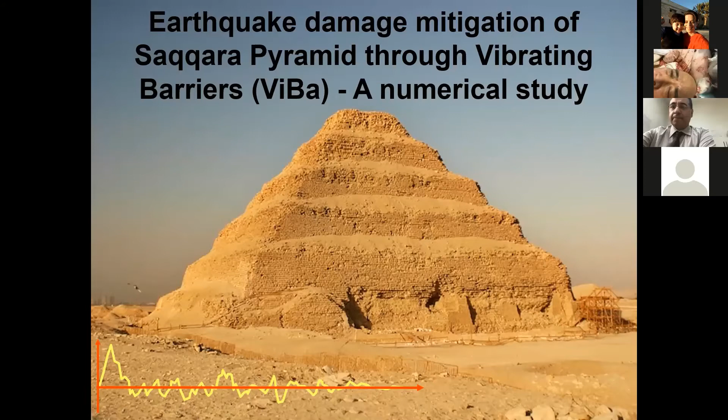I am going today to give a short presentation about our numerical study. This presentation will be on earthquake damage mitigation of Saqqara Pyramid through vibrating barriers, a numerical study focused on the inelastic behavior of the pyramid and the soil, and then the efficiency of using vibrating barriers. As the idea of vibrating barriers is based mainly on exploiting the beneficial effects of soil structure interaction mechanisms, I would like to start with one of the most important factors which control the soil structure interaction, which is the interaction between the fundamental frequencies.

In our case here, we have carried out the numerical analysis under 12 seismic records recorded in Egypt. The fundamental frequencies for these records range from 0.14 to 7 hertz. The fundamental frequency of the soil, which is here limestone, is 22.14 hertz. The fundamental frequency of the pyramid is 0.52. As you can see here, some of the records have fundamental frequencies close to the fundamental frequency of the pyramid.

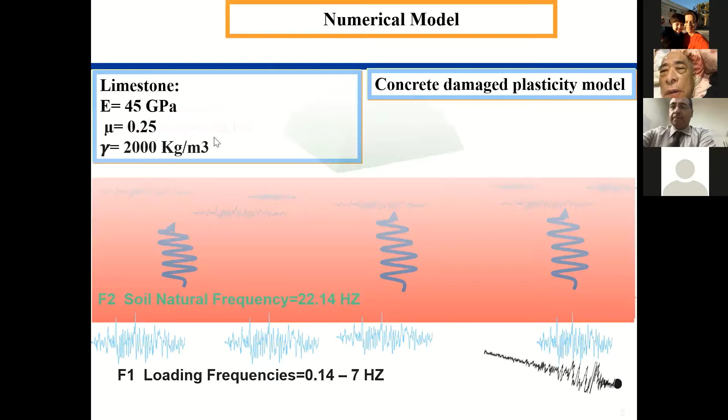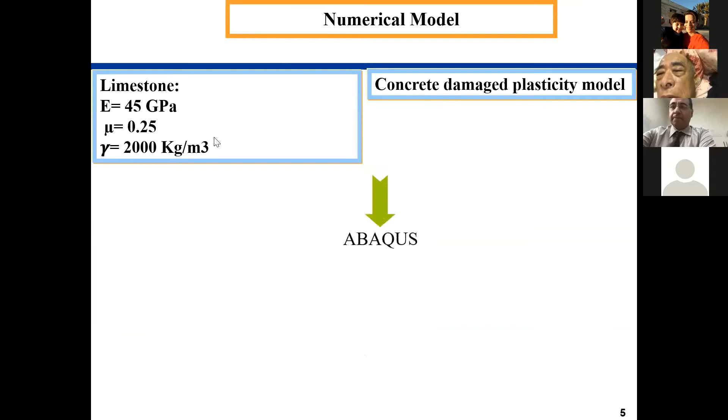In our numerical model, the numerical modeling process was carried out using the finite element software Abaqus 2019. The numerical analysis was performed in 4 steps. First step, the elastic behavior of the pyramid without soil, then the elastic behavior for the soil-structure system, soil and pyramid. Then we analyzed the plastic behavior of soil and pyramid. And finally, we added the vibrating barrier to study the impacts of using this vibrating barrier.

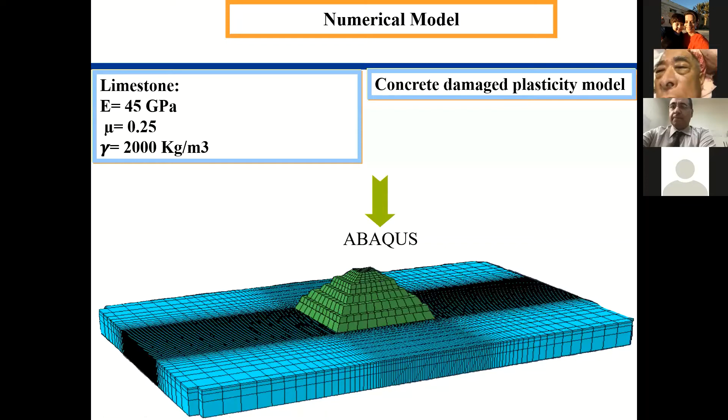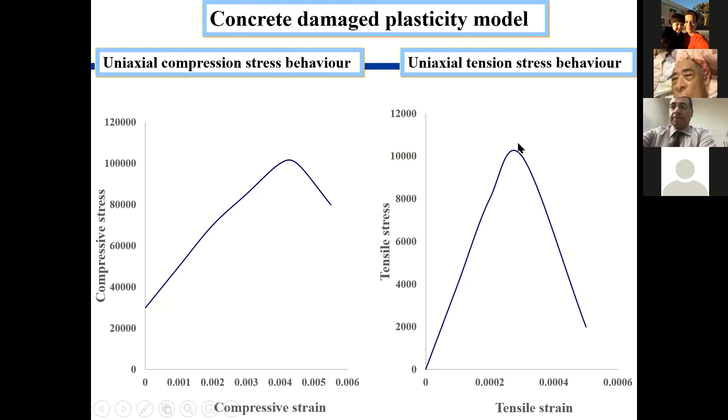Firstly, we have the same material for the pyramid and the soil, which is limestone. Here we have the elastic properties for this material: 45 gigapascal, Poisson ratio 0.25 and density 2000. Also, we have used the concrete damaged plasticity model for simulating the inelastic behavior of the pyramid and the soil. Here we have the data used for simulating the uniaxial compression stress behavior in the concrete damaged plasticity model. We used sigma C maximum equal to 10 megapascal and tensile stress equal to 1 megapascal, 10% of sigma C.

Here we have our model and the mesh, with the dimensions of the soil, as you can see here. The length of the soil used in this analysis is 500 meters, the depth of the soil 35 meters, with width 300 meters. Considering the high sensitivity of soil structure interaction, we have taken some arrangements. For example, we used free-field or quiet boundaries to avoid the reflection of seismic waves on the structure. Also, because this kind of analysis is very costly in terms of processing capacity and time, we decreased the mesh density going away from the structure to minimize the processing capacity and time.

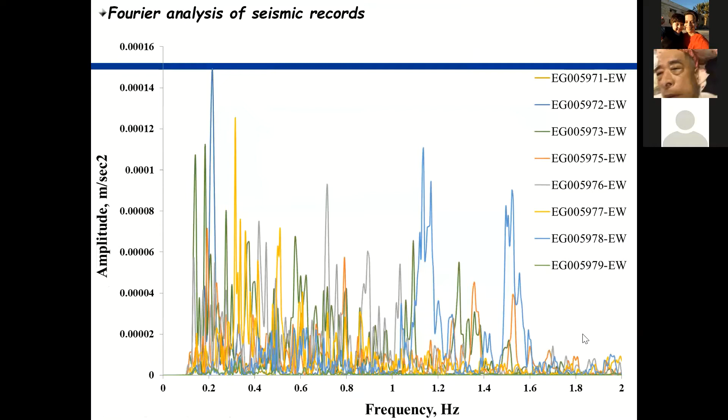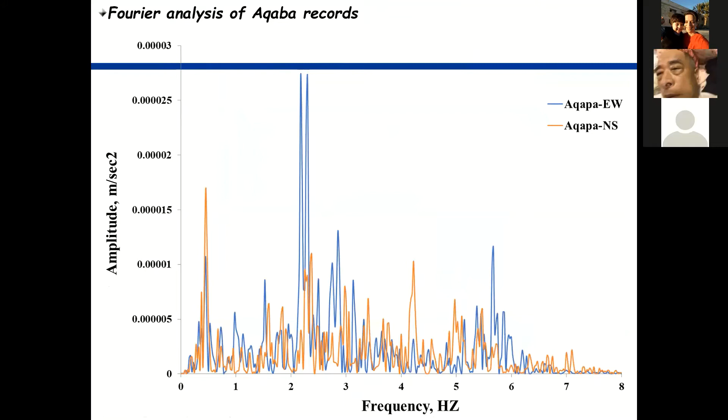Here we have the Fourier analysis of the seismic records recorded in Egypt recently. As you can see, we have frequencies from 0.14 to 2, with amplitude in meter per second squared. Also, here we have the Fourier analysis for the Aqaba records, Aqaba east-west and Aqaba north-south. As you can see, we have fundamental frequencies up to 7, but the maximum is about 2.3. So in the first step, we ran the numerical analysis under the Aqaba east-west record.

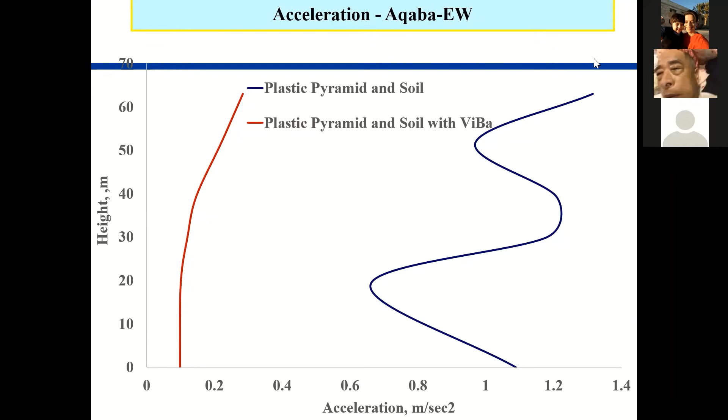Here we have the stress, or vertical stress according to von Mises, without the vibrating barrier and with the vibrating barrier. We can see here we have some tension, but it is very small, 0.6. And here we have more, but here in the pyramid, we don't have this tension.

We have reduction in compression stress in the pyramid when we have used the vibrating barrier, up to 94%, 85%. So it was a huge reduction in compression stress in the pyramid.

We have here the active yield zone in the pyramid without vibrating barrier. A large part of the pyramid already has plasticity and yielded. Here, using the vibrating barrier, I don't have anything. It is 0. Here I have 1 for the red zone. So a large part of the pyramid is already in yield or plasticity.

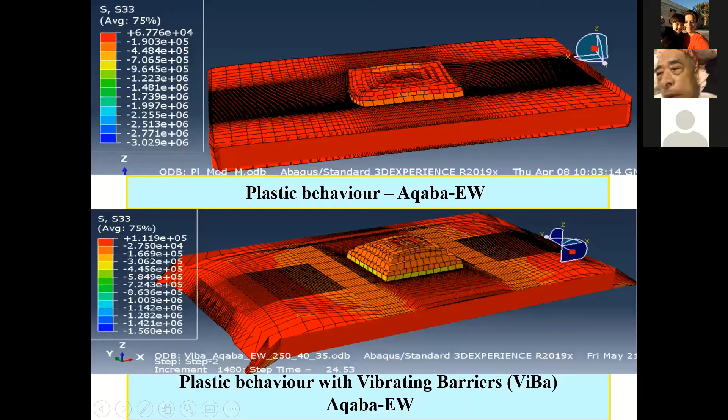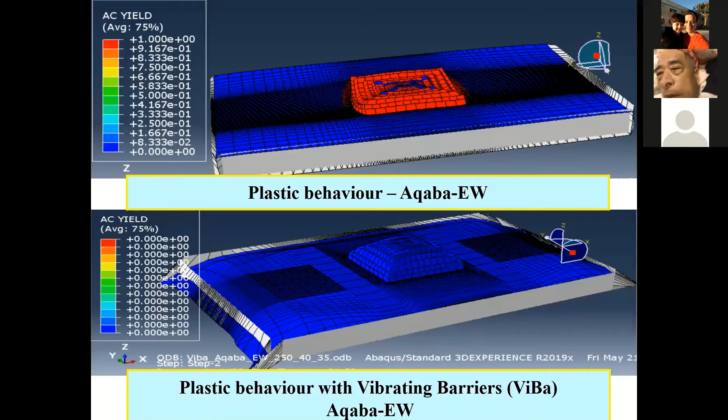Okay, thank you. Can you please go to the very beginning with the model, when you show the various frequencies? Yeah, that one. Thank you. So, if I understood, you are saying the first frequency of the pyramid on its own is 0.52 Hertz? Is that what you mean? 0.52.

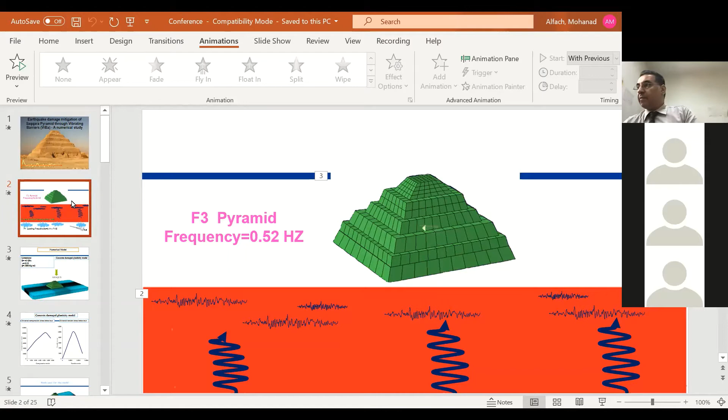Really, it's the first time that I see these results, but I think you know of the paper co-authored by Professor Ayoub and Professor Rashid, where we did our linear analysis. It is published. We have different frequencies, actually. Can you explain? I'm sorry, I noticed that, but I think it is the data. We have different data about the density and the Young's modulus. I received different data, and I noticed the difference between my results and your results.

Oh, I see. The data has been provided by University of Cairo, so we are all using those data. I noticed you have used a different density. They sent 2,000 kilogram. You have used 2,900 or something like that. So it is different from what I received. Also, I noticed there is a difference in the Young's modulus. I'm sorry, it is a problem of data.

Okay, so the material of the soil is different from the material of the pyramid for you? No, it is the same. And how do you explain then that you have 22 Hertz for the soil and 0.52 Hertz? It is the geometry, and of course the height. Here we have 63 meters, and the geometry is different. I have here 35. I think at our meeting we will discuss more in detail.

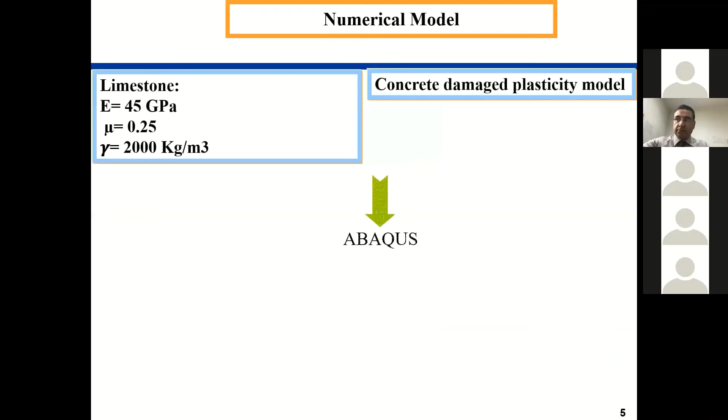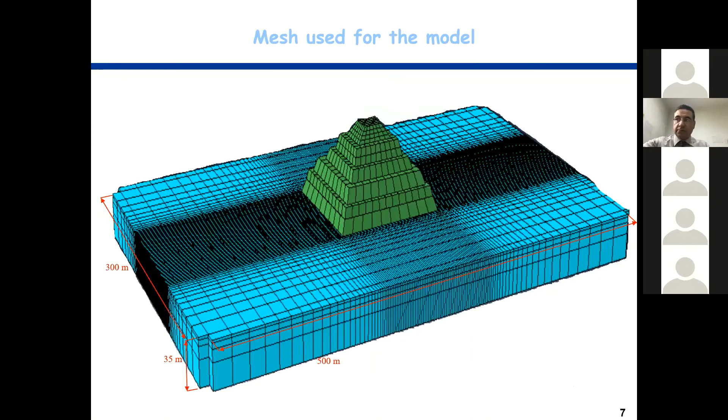No worries. The other thing I was asking is, can you please go to the vibrating barrier? Yeah, this one. So this is the trench of the vibrating barrier. Have you designed the mass vibrating inside this or not? No, I used it as a block of concrete with contact. So practically it's rigid, a block of concrete in the soil. Yeah, and with the interface rigid with the soil.

Okay, I see. I mean, this is not really what we call a vibrating barrier. Practically, this is a solid element. A vibrating barrier has an internal unit that vibrates and needs to be designed in such a way that you reduce the vibration. From what I understand, also the depth is the same depth up to the bedrock. So practically, you interposed a rigid element in the soil. It's good that you had this kind of reduction, but what I want to say is this is not properly what we call a vibrating barrier.

As I understand from soil structure interaction, it is the effect of the inertia of the structure and the foundation. So here we have a kind of foundation, a big foundation or big mass in the soil. So we have the same result, but with a different technique. Yeah, no, I understand that. As I said, this is not what we used to call it.

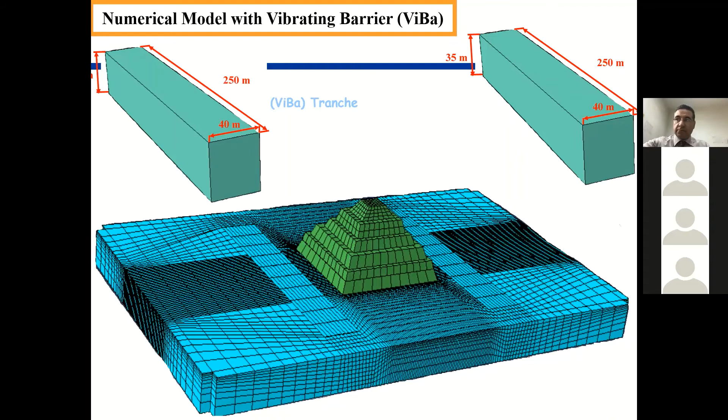For you, I can understand now the model is different, so possibly you cannot use it directly until you fine tune your models with ours, because the vibrating barriers we designed also have the internal unit. But yes, I appreciate that. The other question was about the earthquakes. You said that you got the 1992 recorded earthquake. It's from Egypt. Where do you get that? It's recorded in Egypt, and this is the data from Cairo University. Okay, I think this is synthetic. It's not recorded, this one. There is also the reference for this, but this is what I was curious to see. So it is a synthetic earthquake, not recorded.

Regarding also the use of the other earthquakes, you know that other earthquakes are recorded at the surface, but you are applying recorded earthquakes at the bedrock. Do you see that this can be an issue or not? Yeah, there is a transfer function. I understand that, but actually in this kind of material, we have very small damping. I would consider it as 0 for this kind of material. So of course, there is a difference between what we have at the bedrock and what we have as recorded, but I used the data received from Cairo University, 12 records. So I used these records.

Okay, thank you. As I said, I have quite a number of questions because it's the first time that I see these results. But maybe we can talk at our internal meeting for the project. Okay, of course. Thank you.

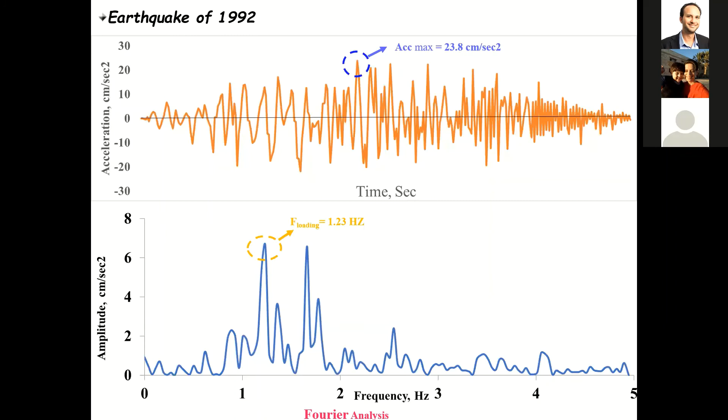Piero, first of all, looking at the slide that is showing right now, I see an acceleration that has lower frequencies the first few seconds, and then frequencies become higher, which cannot be true. Anyway, this is something I'm sure Piero will sort out. One question, Piero: is it one mass with a double-axis VIBA? I didn't quite understand your response on the ideal arrangement of the VIBAs around a structure.

Mohanad, are you with us? Yeah, but I think the question is for Piero? No question for you. It was for Piero. Okay. So Piero, can you give us a reply?

Sure. Thank you, Agis. It's so nice to also see you here. As I said, this is the first time I see those slides. This is not my work. I share with you the concern for the earthquake.

Regarding the VIBA, in the tests that we have done for various applications, we considered the solution with a mass vibrating in three directions, so springs in X, Y, and Z. Mainly X and Y; the Z we did for another application. It was able to give a kind of reduction for any direction. However, it is more effective when the vibrating unit vibrates in the same direction as the input. Therefore, there should be two separate trenches, and the mass needs to vibrate in a single direction.

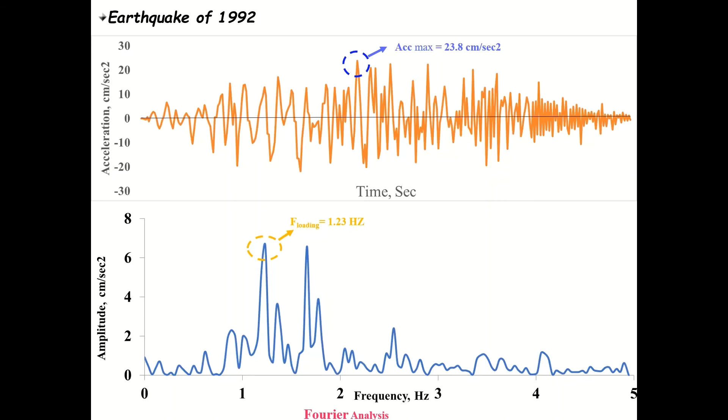In Brighton, we have done some initial study, but not for this problem, for other cases, and we have not published these results yet. But what we have seen is that with nonlinear soil, the VIBA even works better. But these are really preliminary results, so I don't feel like disclosing much, because we have not done a thorough investigation. I know that, as part of this project, they will be doing advanced nonlinear soil analysis at City. Okay, many thanks. Thanks to you.

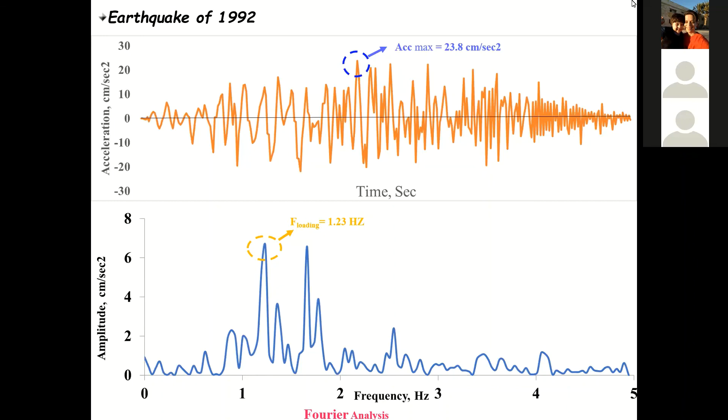This is Ashraf Ayoub from City University. If I can quickly comment, we had a very nice discussion here, and we can continue it later on. Just about the modeling of the VIBA: this is obviously not a properly designed or optimized solution. We're still waiting for this. This is a very initial